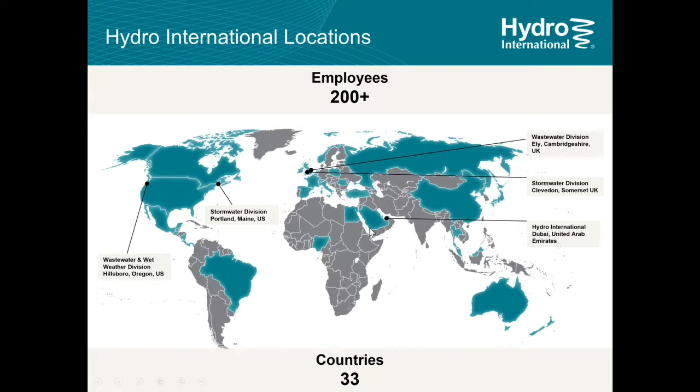Hydro International is truly a global company. We have an office on the east coast of the US, in Portland, Maine, where I'm located, but also an office on the West Coast outside of Portland, Oregon. Company headquarters is in England, where there are 2 offices, and we maintain an office in Dubai to service the Middle Eastern market.

Hydro International does water treatment. We have a line of products for the stormwater market, a line of products for the wastewater market, and a line of products specially designed for the challenges of combined sewer overflows.

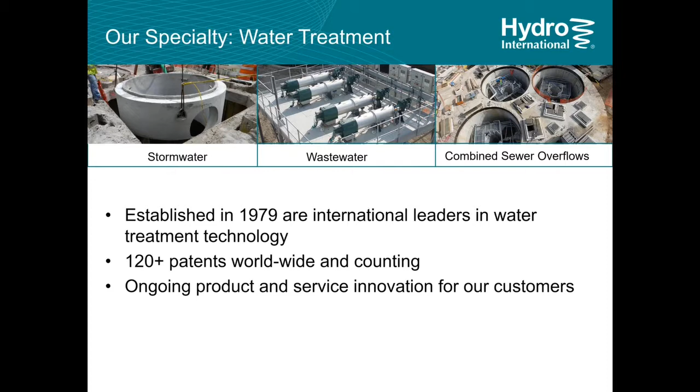The company is almost 40 years old. We have hundreds of patents worldwide and continue to do our own product development and develop our own IP for new products to meet clients' needs.

The stormwater side of the business is about 30 years old, and we have thousands of installations around the country and around the world.

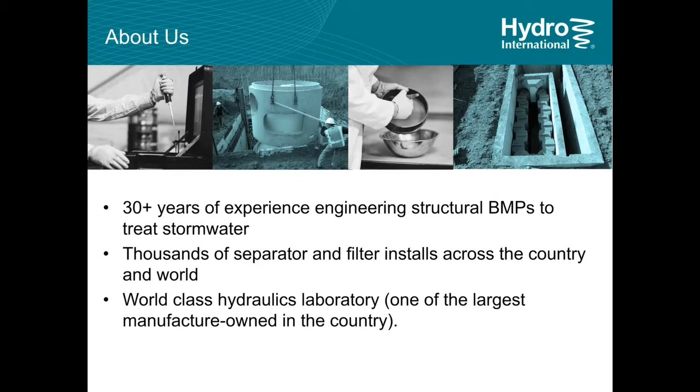One of the things that makes Hydro stand out amongst their peers is we maintain our own hydraulics laboratory. We do all of our own product testing and product development here, so we can really understand what makes a product work well, what needs to be improved, and we can do that on our own schedule to meet our clients' needs.

We're very proud of our collaborations with universities around the world, and these relationships are a two-way street. Sometimes we're taking intellectual property developed at a university and commercializing it ourselves, or we're taking products developed at Hydro and giving them to universities for third-party independent testing.

We also work with regulatory and accreditation bodies around the world, developing test protocols and working within their protocols to test our products. So that gives you an idea of who Hydro is. Now I'll get right to the topic at hand, which is the challenges involved with runoff reduction.

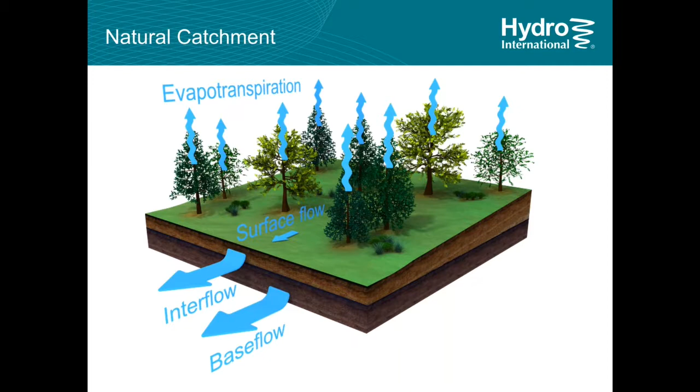Once this catchment is developed, though, that ratio flips. Because there's less vegetation on site, you have less evapotranspiration. Because you have more impervious surfaces, you have less groundwater recharge. So what you end up seeing is a big increase in surface flow.

This is what we're talking about when we talk about runoff reduction, where we want to reduce this surface flow runoff, because it causes most of the downstream issues we're trying to control. Surface flow runoff is what mobilizes pollutants. It produces the velocities that cause erosion. It causes the volumes that overwhelm our sewers and cause CSO spills. So surface flow runoff is what we're trying to reduce.

This brings up the first of 4 polls I'm going to have during this presentation. We're going to do 2 right now, and I'm going to launch this.

This first poll is: is infiltration the preferred method of runoff control where you work? I'll give a minute or so for people to weigh in.

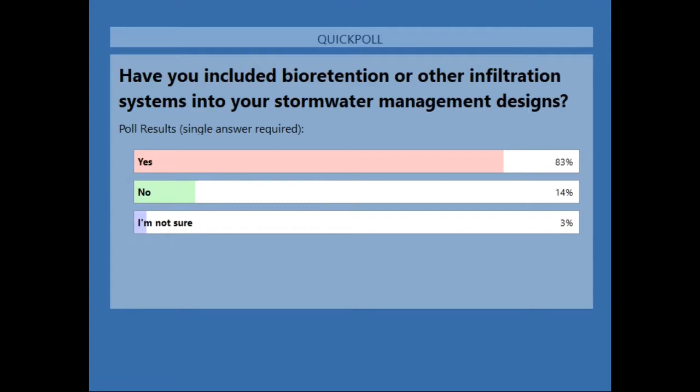So let's share the results of that poll. Most all of you have used bioretention or some other infiltration system in your designs. That's good, I suppose that means you're in the right place.

You know, this is a real funny time of transition for stormwater designers. You've got these BMP manuals at the top, all starting all the way at the EPA level, mandating infiltration as the first option for stormwater treatment. And that goes down from the EPA to the states to the counties.

And then some of it is going to be a little bit more human. You've got contractors and owners who have their own motivations around the development of their site that maybe don't square with the ideals of infiltration. You also have local ordinances that might be slightly contradictory to what needs to be done for infiltration, and I'll get into that a little bit.

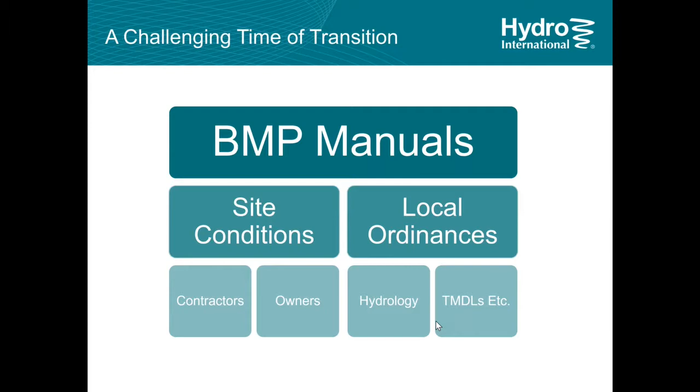Some of that is going to be around parking ordinances and things like that, and some of it is just about hydrology, pollutant control, TMDLs, what you can and can't do with your runoff as it leaves the site. So it's a very complicated design problem.

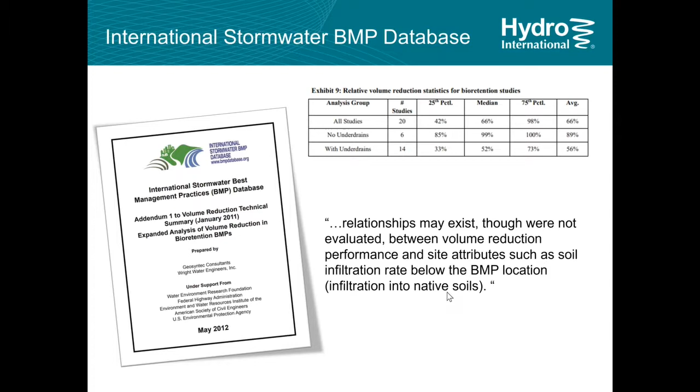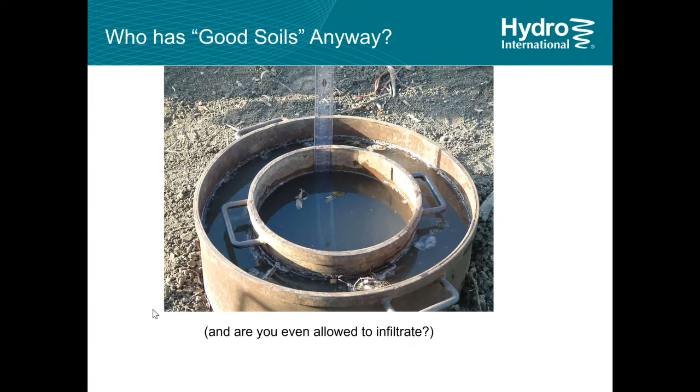And beyond, even if you do have good soils, are you even allowed to infiltrate? There are definitely spots that we've come in contact with where there are protections around groundwater or protections around aquifers. And even though you may have good soils, you're not allowed to infiltrate in certain spots or at certain rates.

So one more poll here, just to set the stage. This is: what is your biggest infiltration challenge? And I'll describe these a little bit.

Crowded sites, just having the space to put your infiltration. Limited drop or head hydraulically - can you fit the hydraulics into the vertical space on your site? Failed plantings - many of these systems have plants established on them, are those plants staying healthy? Erosion of media - is the erosion leaving the site? Or something else, something that we haven't identified here.

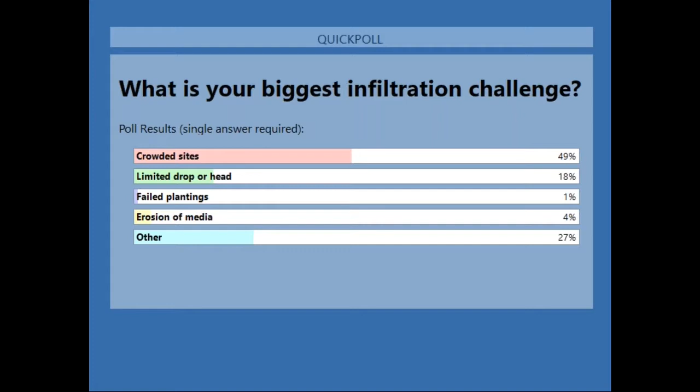So I'm going to start off by talking about some challenges around hydrology, and this really ends up being about challenges that have to do with use of space on a site.

I don't need to tell you that sites are crowded, you appear to know that, and I don't need to tell you that land is valuable. Some of my citations here are starting to get a little old, but the story stays the same. In a rural setting, you might be talking about land values of $50,000 an acre. In an urban setting, you're talking about land values much higher than that, maybe $1 million or more.

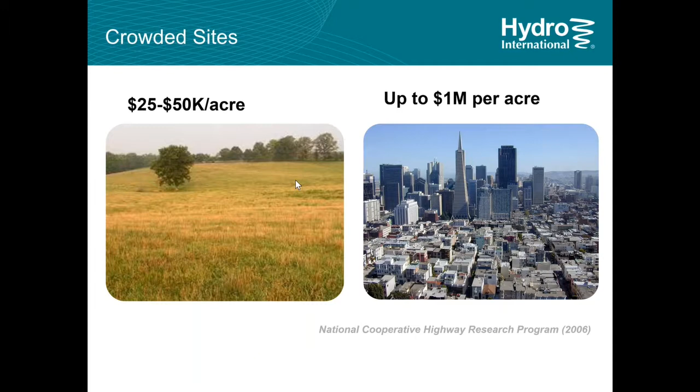So the value of these sites provides a certain level of conflict between people who are trying to infiltrate and people who are trying to develop, because it's hard to do both on the same site.

To give an example, just to draw attention to one thing: parking space ordinances. The parking spaces in a site are valuable, worth more than just the land that the parking space contains. Because of parking space ordinances like what I'm showing here, you are required to have maybe 5 parking spaces per 1,000 square feet of retail space. So the amount of parking you have on site is directly related to how much retail space you have, and retail space is very valuable.

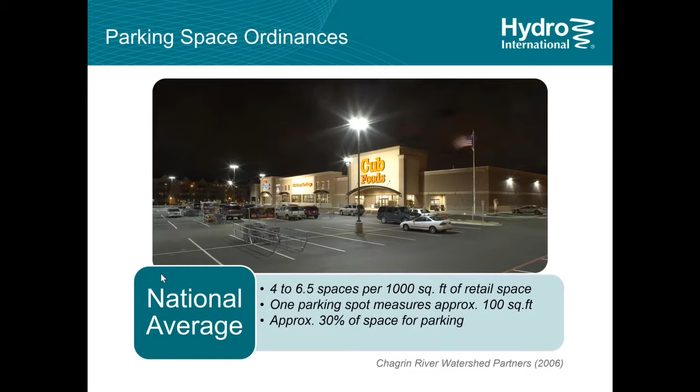So all of these ordinances make it so that there's some real conflict between how much of your parking lot is allowed to be used for planted infiltrating areas. Taking parking spaces actually translates to taking retail space, which is, for a developer, a real conflict.

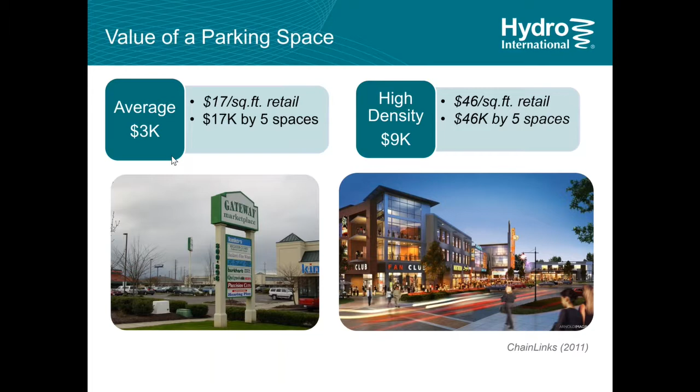If you run the numbers based on some basic estimates of how much retail space costs, the value of a parking space can be somewhere around $3,000 or $9,000, once you take into account the actual value of the entire lot and the way it gets translated into retail space.

Now I'm going to give a few different tools and tricks that people have used to get the most out of their parking spaces and still meet their infiltration goals. I'll start with some ideas that are straightforward and easy, and get into some that are more complicated - could probably have a webinar of their own - but I'll do my best to summarize.

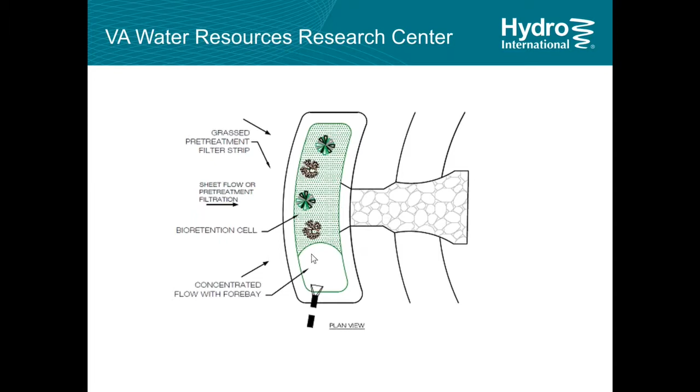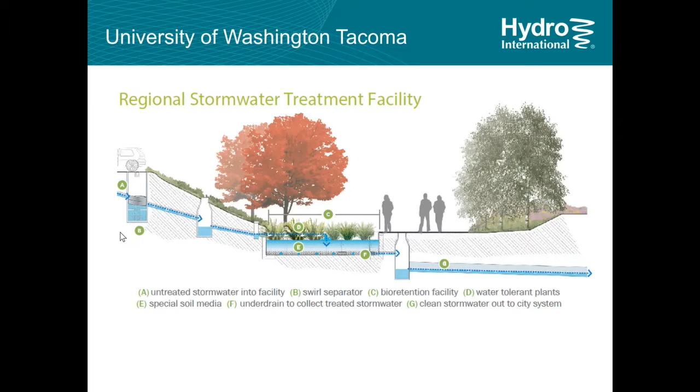This is a very straightforward thing to do, and is already in use in a lot of places. Pre-treating with a manufactured treatment device has follow-up benefits. Not only does it keep your trash, floating material and coarse sediment under control, but it also helps maintain a tidy appearance rather than having that concentration of trash end up in a planted area that's intended to be attractive. Now it's kept undercover, centralized, and out of sight.

These systems are usually designed to retain that material during a large storm, so there's no sense that it's going to remobilize or blow away. Maintenance is a lot easier - you can pull up right over this with a Vactor truck, draw out the trash and coarse sediment, rather than go through with rakes and hand-picking trash out of a planted area. And as I was saying, it immediately gives you a 20 to 25% smaller footprint.

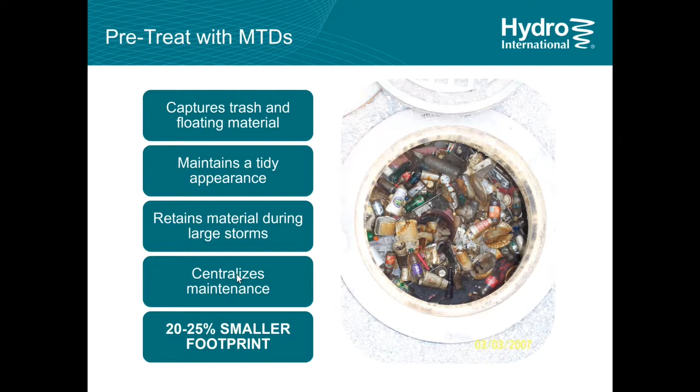You've probably run into manufactured treatment devices before - they're very common. Hydro International makes them; we have two products, one called the First Defense, another called the Downstream Defender, but there are lots and lots on the market to choose from. So this is right off the bat a very simple way to make that planted area you have a little more efficient.

The bigger question, though, and the harder one to answer, is what do you do with all the water?

So when you're designing an infiltration system, you have a lot that you're juggling. You'll have a water quality volume that you're mandated to control and infiltrate, but maybe your site has low infiltration rates. So what do you do with all that water? It can't get into the ground fast enough, so you have to pond it. But where is your ponding going to occur? And once you have this water ponded, how long is it going to stay there? There may be regulations about how long you can have ponding on a site.

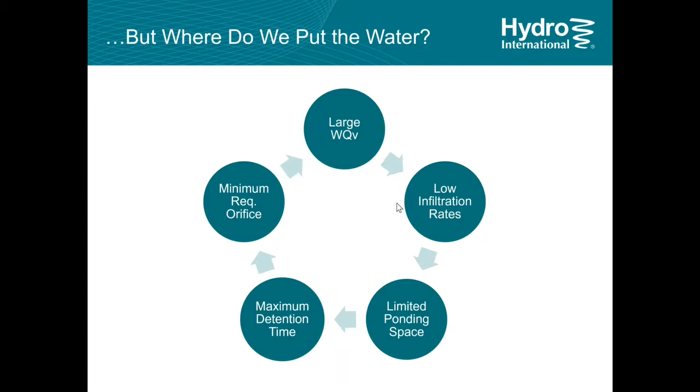And as you're moving this water around your site, trying to get creative about where it goes and how you're infiltrating it, you may have requirements about minimum orifice sizes, and at the low flow rates we're talking about, that can be a challenge. So all of these things are hard to juggle.

Just to put some real numbers to this, it's not uncommon to have to manage a 50-year storm with infiltration rates on site of less than 1 inch per hour. Maybe hydraulically you only have less than 12 inches of vertical space for ponding. It's very common, because of vector control, that cities will ask that water not be kept on site for longer than 24 hours. And lots of areas say you have to have orifices big enough to pass a soda can, meaning you need something around 3 or 4 inches. So all of these things play together to make for a really challenging design problem.

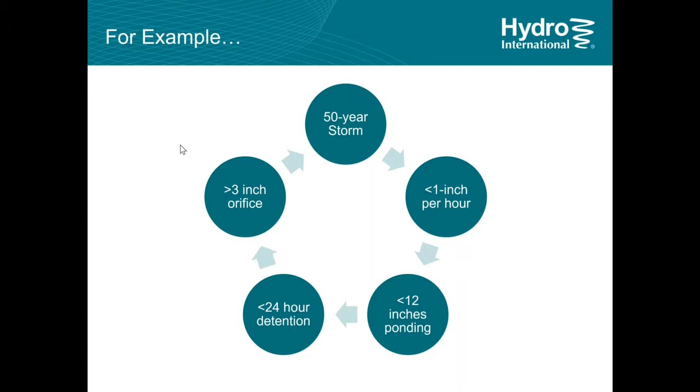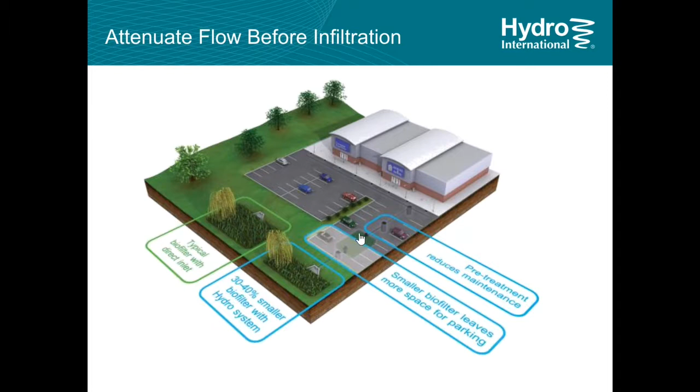One way people deal with this is to essentially decouple their water storage from their water infiltration, arranging it so they're storing water upstream of their infiltration system, underground, where you can park on top of it essentially. Here's an example with some attenuation upstream of a bioretention system - this is storage under parking. You've probably run into these sorts of storage tools before.

There's lots of options on the market - these arch storage chambers you've probably seen, concrete chambers, and these open structure plastic blocks that people use for storing water. What I'm going to talk about are these guys down here, and these are a little rarer - maybe you haven't seen these before.

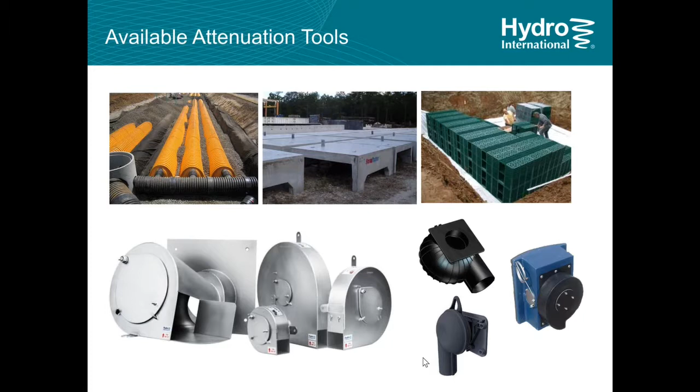These are called vortex flow controls. Hydro makes the ones on the left here - the trade name we use is Hydro-Brakes - but they're made by other companies as well. These are ones made by other people. They're very common in Europe, often installed by default, but a little less common in the US, though starting to catch on in some areas.

A vortex flow control is sort of a constant discharge valve in a way. If you deal with orifice flow controls regularly, you'll recognize this sort of head discharge curve, where if you have an orifice and your flow starts to increase, your head starts to increase as well, usually based on the square of the velocity. So you end up with this sort of curve.

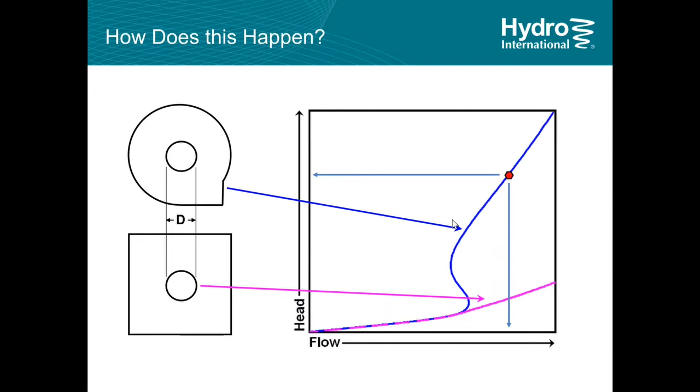With a vortex flow control, you have this strange looking head discharge curve that's sort of S-shaped. As flow increases, head increases just like in an orifice, but at a certain point water begins to swirl around in this vortex valve, and now it begins acting like a constant discharge valve, where flow does not increase anymore. It stops increasing, and now just head increases all the way up to a certain design point that can be specified. This has a whole bunch of uses, and I'm going to give a couple of illustrations based on a project we were exposed to.

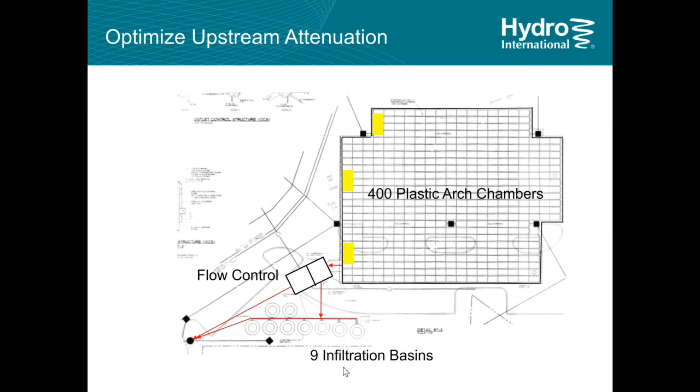This is a site - you might have had similar situations yourself. We had 400 plastic arch chambers here, upstream of some infiltration - there's 9 infiltration basins offline. Now these infiltration units could be a lot of different things - they could be injection wells, they could be a large sand infiltration unit, they could be a variety of different things. But for the sake of conversation, we're just calling it 9 infiltration basins.

So I'm going to start getting into some numbers here.

What vortex valves allow you to do is really optimize the use of the storage media that you already have on site. So for example, in this case, you had 400 units of plastic arch chamber, and they were upstream of a diversion structure.

The engineer who designed this said, I'm going to use a 4-inch orifice. Why did they decide to use a 4-inch orifice? I don't know. Maybe it was local regulations, or maybe they had a bad experience with small orifices in the past and felt they needed a 4-inch orifice. By using a 4-inch orifice here, they ran this through their HydroCAD or whatever hydraulic modeling software they were using, and ended up with a flow rate of 0.5 CFS coming from the storm attenuation.

They looked at the infiltration rate they were working with and said, okay, 0.5 CFS, I'm going to need 9 of these infiltration units. It's going to take around 2,000 square feet of space. I'm going to need to make room for those things there. And I'll end up storing around 13,000 cubic feet of water in my upstream storage.

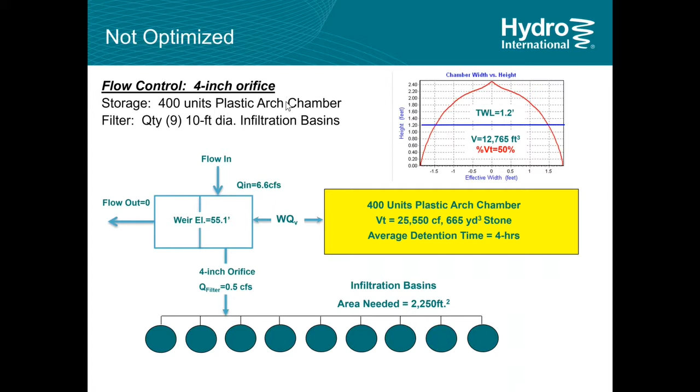Now, if you swap out that 4-inch orifice with a 4-inch vortex valve, a couple of things happen. One is right away, your flow rate drops down. This is the maximum flow rate leaving. Your maximum flow rate drops down to under 0.2 CFS. So we were at 0.5 CFS, now we're down below 0.2 CFS. So you can get away with a much smaller infiltration area.

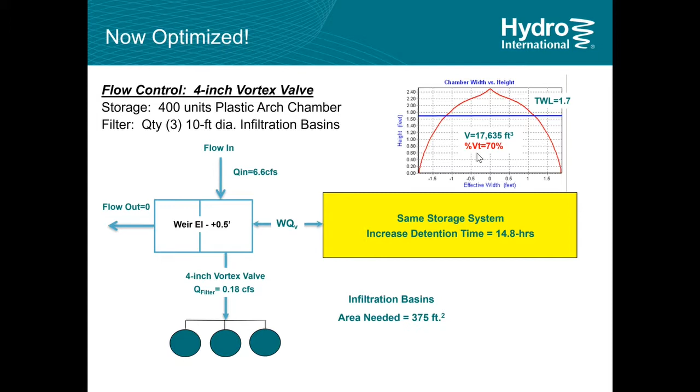Now, maybe they only need less than 400 square feet there. In addition, all of that water is being stored in plastic media that's already installed. So what's happened is it's gone from being 50% used. Now we're storing 17,500 cubic feet here in this plastic arch chamber. We're using it more efficiently. We're using 70% of it now.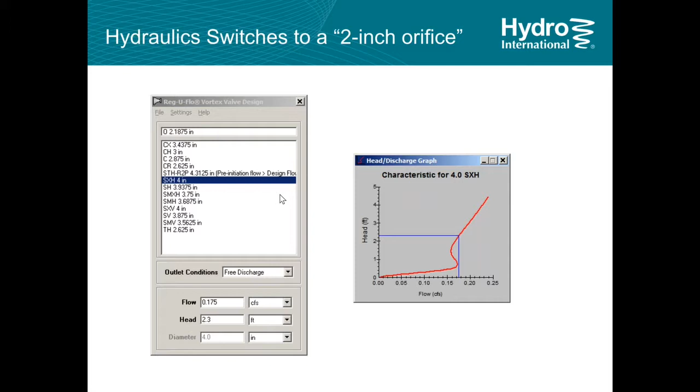So you might be saying now, well, that doesn't really apply to me. I'm fine using a 2-inch orifice. There's no regulations around that in my area. And I'm very comfortable putting an orifice inside a screen and protecting the orifice that way, so I'll just use a 2-inch orifice.

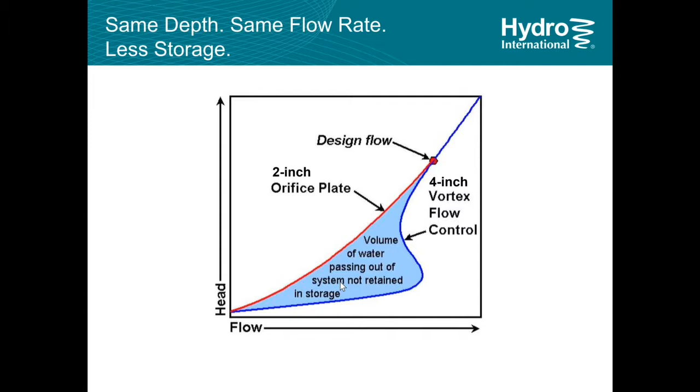There's one other way that vortex flow controls can save you some space on site. It's a little more complicated and it could be its own presentation, but I'm going to give it a go. The 4-inch vortex flow control has this strange shaped curve where it starts off acting like a 4-inch orifice, and then it transitions and begins acting like a 2-inch orifice. So if you had this red curve that is the way a regular 2-inch orifice would work all the time, there's a space in between, and that space kind of represents the volume that you can save that you don't even need to store if you design your site appropriately.

So here's an example, and for those of you who use HydroCAD regularly, these graphs will look very familiar. For those of you who don't, they might look very strange, but this is a comparison between a 2-inch orifice and a 4-inch vortex valve. Same site as we were talking about before. And just to highlight a couple of things, we're running a hydrograph through here that's a sort of a peaky type 1A storm, high intensity peak to it.

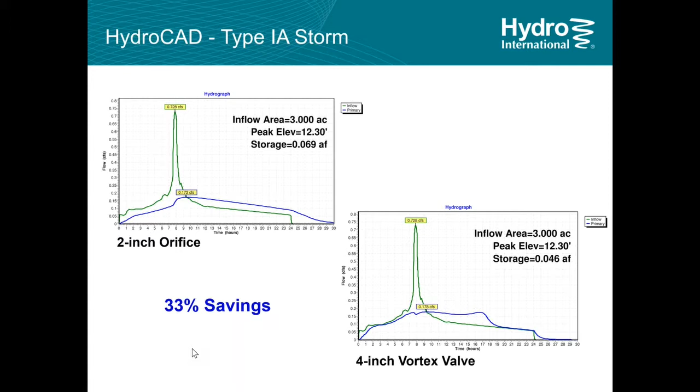Both the 2-inch orifice and the 4-inch vortex valve have pretty close to the same maximum discharge flow rate, just about 0.17, 0.18 CFS. So the maximums are the same. But if you look at the storage required, the 2-inch orifice requires 0.07 acre-feet of storage, and the 4-inch vortex valve requires 0.05 acre-feet of storage. So this is a 33% savings. That's literally, you don't need to use a third of the plastic arched chambers that were shown on the original design. This seems a little strange.

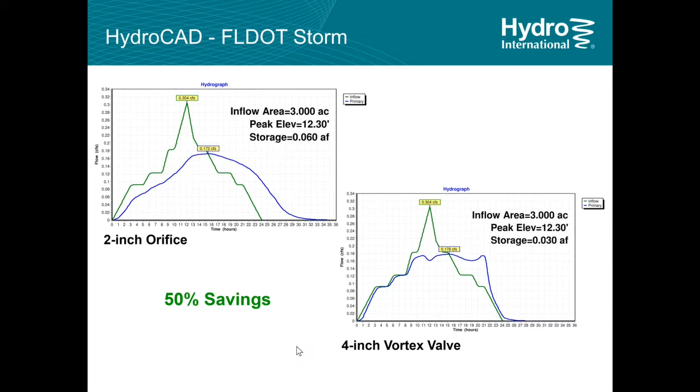It gets stranger. If you had a storm that is even less intense, has a less intense peak, this is a Florida DOT storm. I think some of the storms in the Pacific Northwest are good for this as well. And you compare the hydrograph of a 2-inch orifice to a 4-inch vortex valve. Again, maximum flow rate leaving - the green is your influent hydrograph, the blue is the effluent hydrograph. Maximum discharge is about 0.17, 0.18, about the same. The 2-inch orifice needs to store 0.06 acre-feet. The 4-inch vortex valve needs to store 0.03 acre-feet. So that's a 50% savings. Literally, you can use half the storage media, half the arch chambers.

So how does this really happen? What's going on here?

The 2-inch orifice starts storing right away, but the 4-inch vortex valve doesn't start storing until the storm gets to the design point of about 0.17 to 0.18 CFS. At that point, the 4-inch vortex valve starts acting like a 2-inch orifice, and that's when it starts storing. So it only has to store the peak of the storm rather than the whole upper leg of the storm. That's how it happens. It's a little complicated.

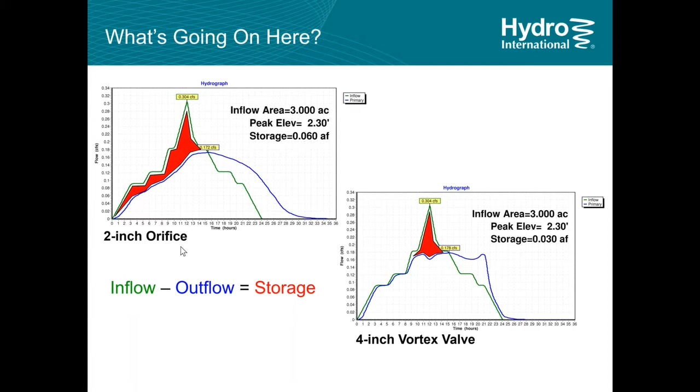So just a summary about saving space on site. A quick way to reduce footprint is to put your pre-treatment under a parking space. You can use an MTD, a manufactured treatment device, to do that. Immediately, you can save 20 to 25% of the footprint of that infiltrating system.

You can use a vortex flow control, particularly if you have orifices around 2 to 4 inches. That's a great rule of thumb for where vortex flow controls operate their best, and they allow you to make full use of whatever storage chambers you have on site. They may also reduce your storage volume by 10 to 50%, depending on your storm.

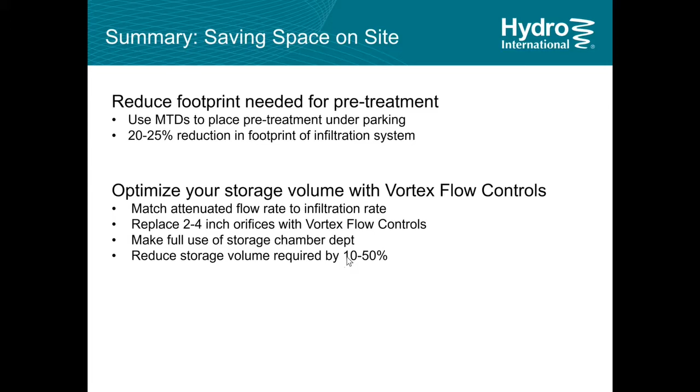So now I'm going to talk a little bit about media challenges. This is what you've handled for where your water is going to go. Now, what about this actual infiltration system you have?

Again, this figure I have here may have changed - I think I dug this up almost 10 years ago now, and green infrastructure's come a long way since then. Whether you call it green infrastructure or LID, you know what I'm talking about. But the fact still remains, in order for a bioretention system to perform well, there are lots of factors at play, and most of them are out of the control of the designer.

While designers might have some control over preventing erosion in the design and a little bit of control around pre-treatment, some of it comes down to good site conditions. Some of it comes down to whether the design was built right. And whether the system stays working well comes down to good maintenance, and whether the owner stays involved.

The installation of media can be a sensitive thing. Protection during construction, and making sure the contractor putting it in knows what they're doing, is not something the designer always has control over. So even if we're seeing success rates of 2 out of 3, that's a 30% chance that something's going to go wrong, and that's reason to have your eyes open.

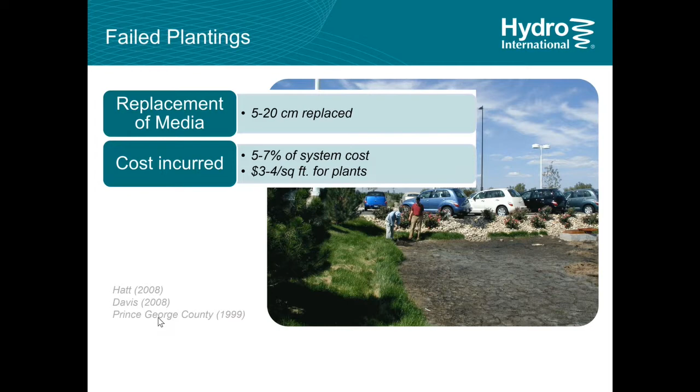Failed plantings, while maybe not that expensive, are still a matter of managing your reputation, and nobody wants to get a phone call that says, hey, those plants that just went in, they're all dying - what's going on? So this is something people need to understand. And there's a temptation to fertilize all the plantings, which then ends up leaching nutrients out. So it's complicated.

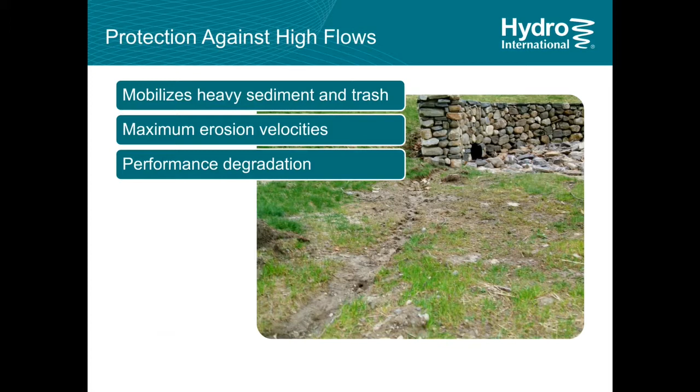Managing high flow rates - how do you manage heavy sediment and trash, erosion of sediment, of media, all of this sort of thing? It can lead to performance degradation. How is that designed? So what happens?

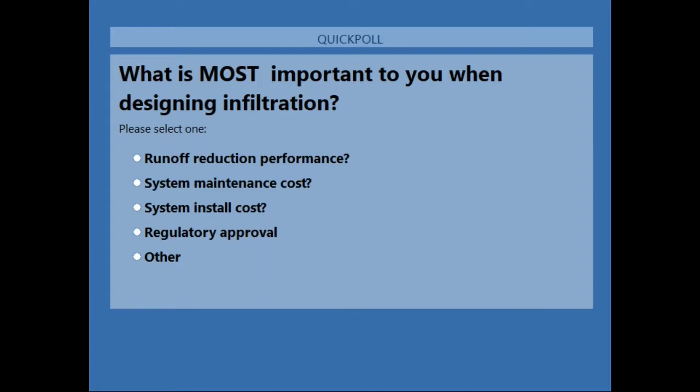So it's kind of a split here - runoff reduction performance, regulatory approval. In a lot of ways those go hand in hand, don't they? So that's really useful information, and we've heard that from a lot of people.

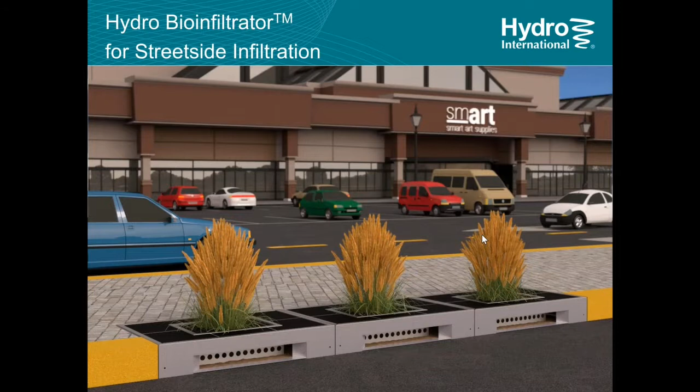One way that people will mitigate the risk of designing their own infiltration system or bioretention system is to buy a manufactured infiltration system off the shelf. When you do that, you also buy a guarantee of performance, and that's often a useful way to take some of that risk off your own plate.

So Hydro has their own off-the-shelf engineered infiltration system. There are quite a few of these on the market, and this one is ours. What we've done is we've really tried to maximize some of the features that people have told us are the most useful for bioinfiltration and runoff reduction.

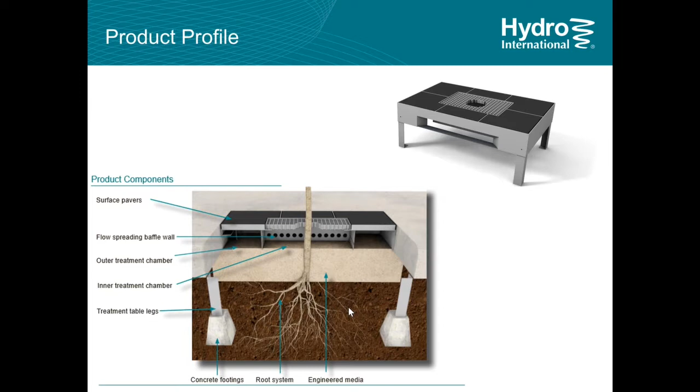So just quickly, the parts of this: we've got a really open structure. The point with the bioinfiltrator was that people said we need to have the most contact with native soils to maximize infiltration. We don't want to be limited by the concrete box that is provided. So these components make up an open system that allows runoff to go right into the native soils and allows tree roots to migrate out and keep that soil free flowing.

This is what it looks like when it's installed. No concrete box, maximum contact with the soil. The roots can keep that soil open, avoiding plant failure. You can kind of see it going into the ground here.

And because there's no concrete box, it's lightweight, it's modular, it's easy to install. There's no crane needed for installation. You can pick it up with a landscaping crew. Everything is made of stainless, aluminum, rubber parts that can be easily handled by a couple of people.

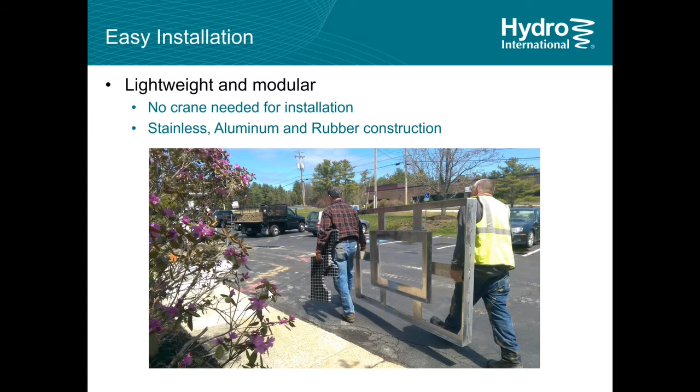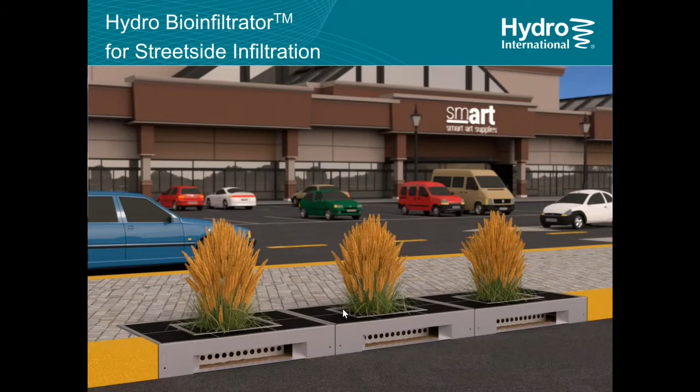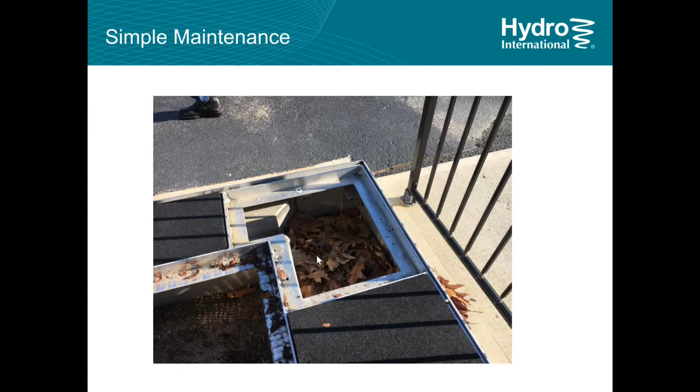Maintenance is simple. You can see at the top here there are pavers made of recycled rubber. When these pavers come off, you can see there's a concentration - all of the trash and leaves and material that would otherwise clog a filter have been collected in this spot. You pop off the paver and you can pull these out by hand. It's very simple.

I had mentioned managing velocities - erosion of media is a big concern. In some manufactured units, it's managed by rocks or riprap installed in the throat of the unit. We opted for a more engineered solution. We have a baffle here that intercepts the flow as it comes in, slows it down, allows it to deposit the coarse sediment, and allows trash to deposit here.

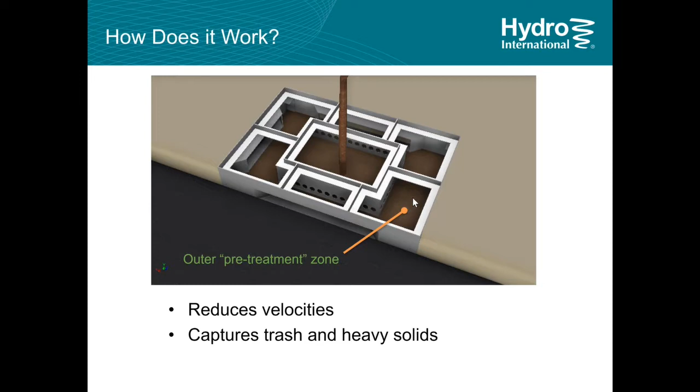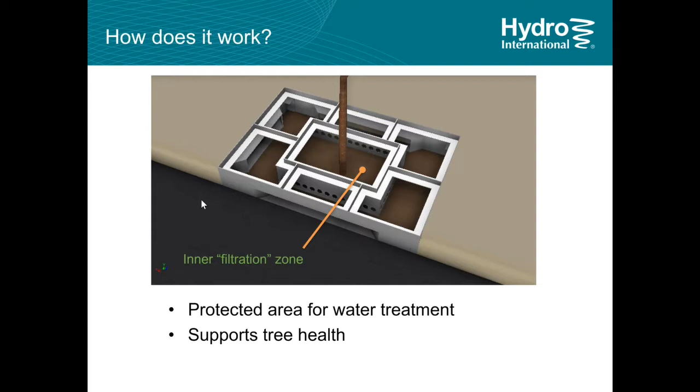This is sort of this outer pre-treatment zone that concentrates all of those heavy pollutants. The tiles are shown off here, but normally that would be kept out of sight so everything stays tidy looking. The inner filtration zone stays open - this is the planted area. Plants don't have to compete with all this coarse sediment and trash. That stays protected and open for maximum infiltration.

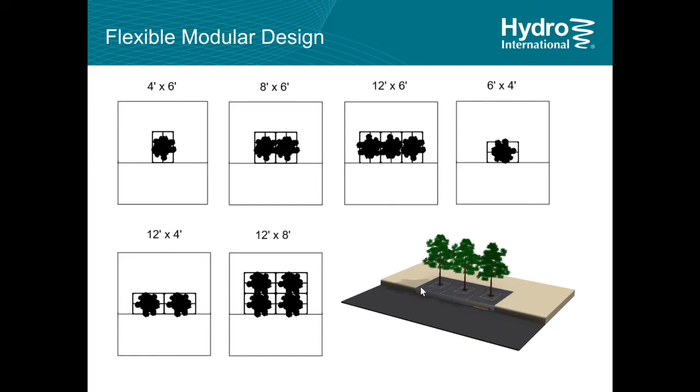The design is meant to be flexible and modular for folks designing streetscapes. So the base model is this 4x6 design, but they can be nested, turned, or arranged in different patterns to come up with different designs that fit the space they're being used in, or use them all the way down to median. This is one use that we imagined here.

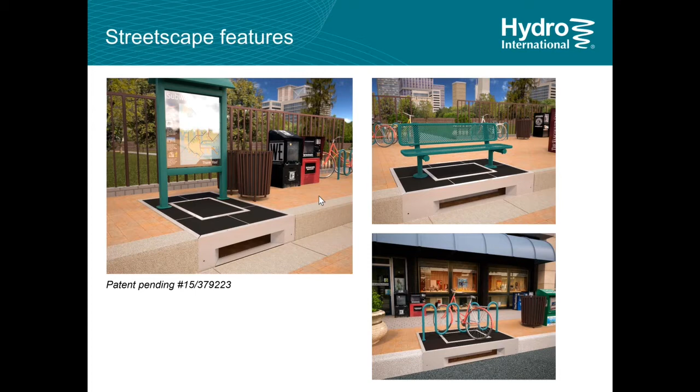And finally, if managing plants isn't in the cards for the particular space where they're being deployed, they can be provided with streetscape features - perhaps a kiosk, a bike rack, or a bench. So this would be a way they could fit into an urban environment, maybe without the concerns that come along with plant maintenance.

So a few conclusions here: every site is different, and runoff reduction is complicated. For engineers designing runoff reduction for sites, they need a broad toolkit that can meet lots of different conditions. Some careful application of engineered devices can help green infrastructure go a long way.

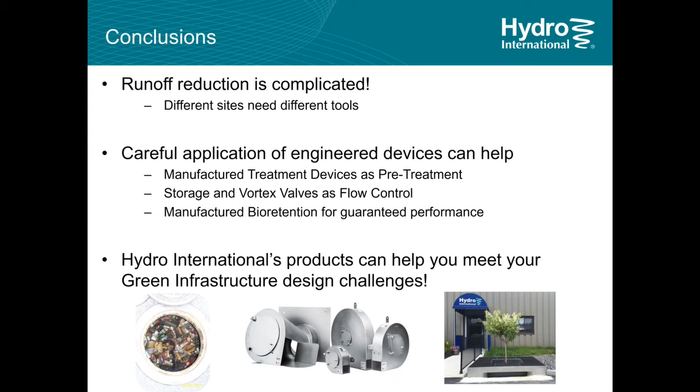Manufactured treatment devices as pre-treatment, storage and vortex valves as flow control can help put your flow under control and help store your flow under parking. Manufactured bioretention or infiltration can give you that guaranteed performance that takes the risk off your plate. And Hydro International has these products - they can help you meet your green infrastructure challenges, and we're happy to talk to you about how we can help.